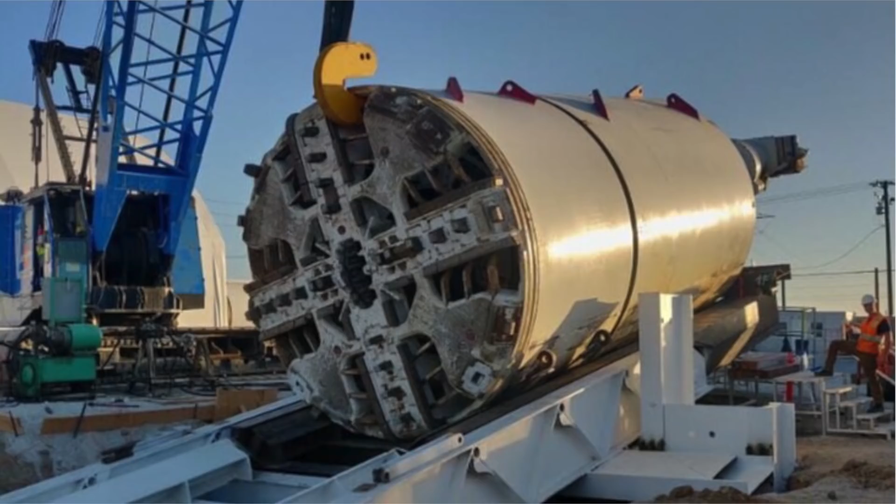There are now 5 parts to the Boring Company FAQ. There used to be just a simple FAQ. There's now tunnels, TBM, loop, safety, and construction. We're going to go through each one of those. The most exciting detail to me is about Prufrock. Prufrock is the future tunnel boring machine that Boring Company is working on that will be much faster and much more efficient and enable building a much larger tunnel network, making all of our lives better. So let's get going.

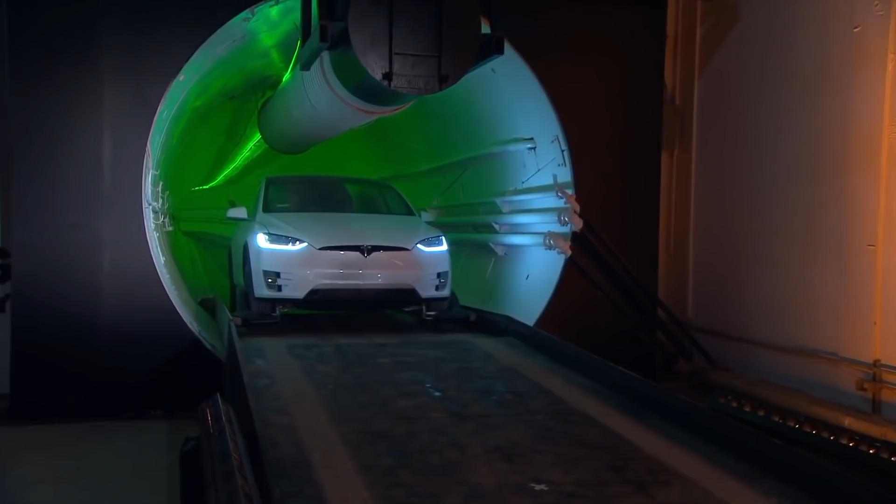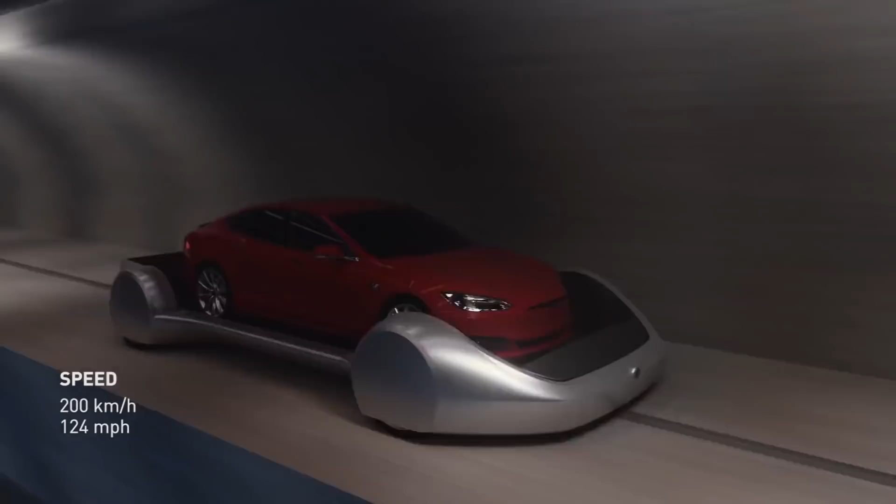First, on the tunneling section, I don't think a lot of this is new information, but they detail advantages of tunneling at some length. Unlimited capacity, you can build as many tunnels as you want. Minimal land use, the tunnels themselves go under land, so they don't really take up land. There's some land use for stations, but not a whole lot. Benefits of tunneling include unlimited capacity. No practical limit to how many layers of tunnels can be built, so any current or future capacity outcome can be achieved. This flexibility contrasts with a surface system where adding a lane to the road is often difficult.

This is a really big deal and one of the really big advantages of the Boring Company. It's very hard to build more roads on the surface because you're operating on a 2-dimensional surface. Tunnels operate in 3D, you can go deeper. And also, there are no buildings underground, so there's a lot more room even on one level. So, huge advantage for the Boring Company here.

Another thing they mentioned, minimal land use. The tunnels don't use a lot of land on the surface. Same basic point. Yes, there would be some stations, some spots where vehicles or people would come up and down from below, but most of the operations of the tunnel are underground, so they don't use surface land, which is valuable.

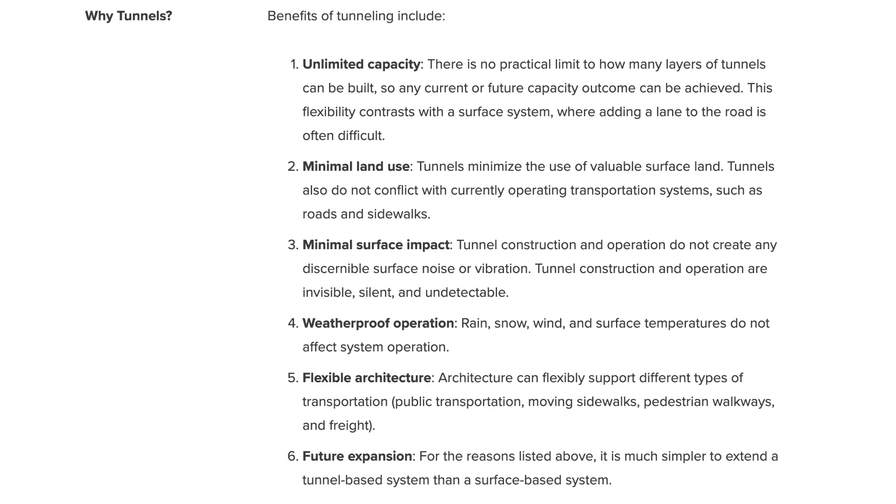And there's minimal surface impact, because it's deep enough, more than 30 feet underground, the impact of the tunneling and of the operation is not felt at ground level. If you've ever been in New York City above a subway, sometimes you feel it. The way the Boring Company plans on doing the tunnels, you shouldn't notice it from the surface. Weatherproof operation, that's an obvious benefit of tunnels. They're not affected by weather.

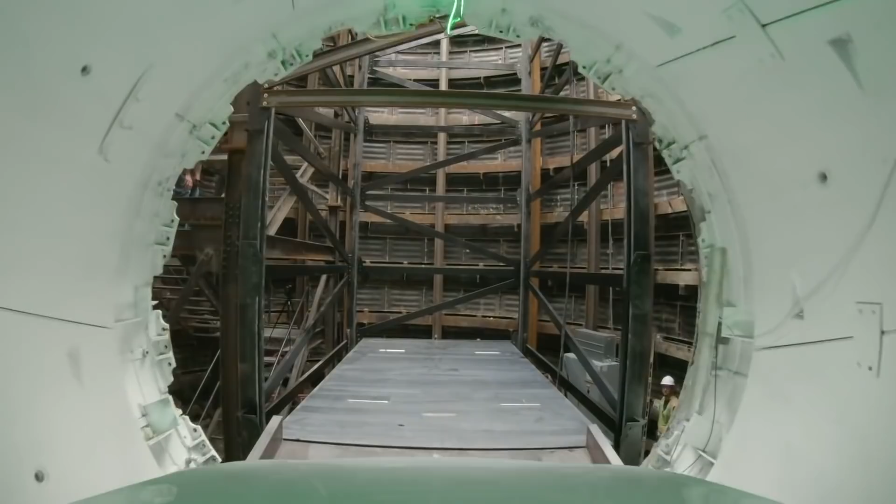Flexible architecture, you can do different kinds of transportation with tunnels. There's a lot you can do. Future expansion, it's easy to expand a tunnel-based system, as opposed to how much more difficult it is to expand a road-based system or a rail-based system. It talks about why this hasn't been done before. It used to be that tunneling was very, very expensive.

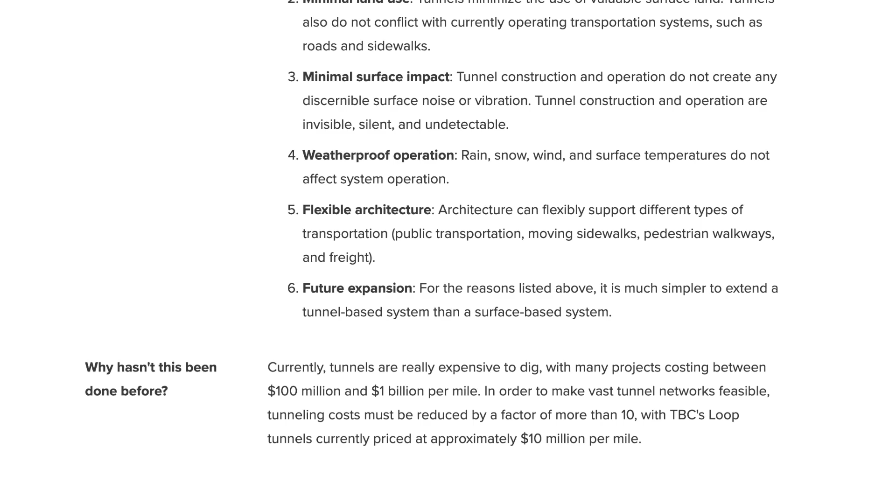One of the key things that the Boring Company is trying to do is reduce the cost per mile of tunneling. Where it might have been common in the past, and might still be common now, for tunneling to cost $100 million or $1 billion a mile, the Boring Company is already under $10 million a mile. And based on my conversation with Will, we think they very well may get down to $5 million a mile or less.

This is a fun part. This is Prufrock. Prufrock is the long-term goal. For those who haven't followed the Boring Company before, the first boring machine that did the tunnel in Hawthorne, California at SpaceX headquarters is called Godot. There was supposed to be an intermediate tunnel boring machine called Linestorm. As best I can tell from my conversation with Will, the machine used for the Las Vegas project was a mix of Godot and Linestorm, and it was achieving somewhat higher speeds, and it got its cost down to maybe $7.7 million a mile instead of the $10 million a mile they've been talking about.

So this picture that they have here is of Prufrock, and it's important to note the way they have it pictured. It's on a cradle, and we're going to explain this cradle in a minute, but notice that cradle. This is going to play into what's coming.

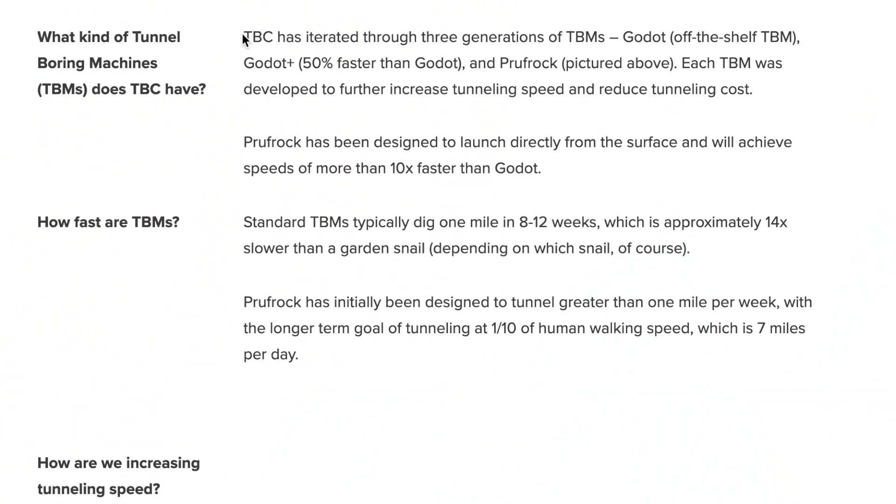As explained here, the Boring Company has iterated through 3 generations of tunnel boring machines. Godot was an off-the-shelf tunnel boring machine. Godot Plus was 50% faster. I guess they've left out Linestorm, so I guess the machine that they used in Las Vegas was Godot Plus, and they skipped over doing Linestorm. It used to be there was this idea they were going to have an intermediate machine called Linestorm, and it looks like they've given that up, and they're going straight to Prufrock.

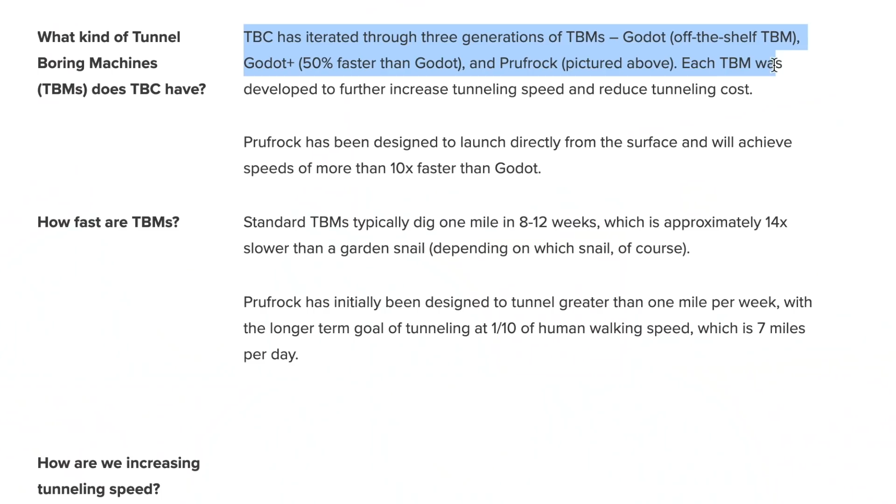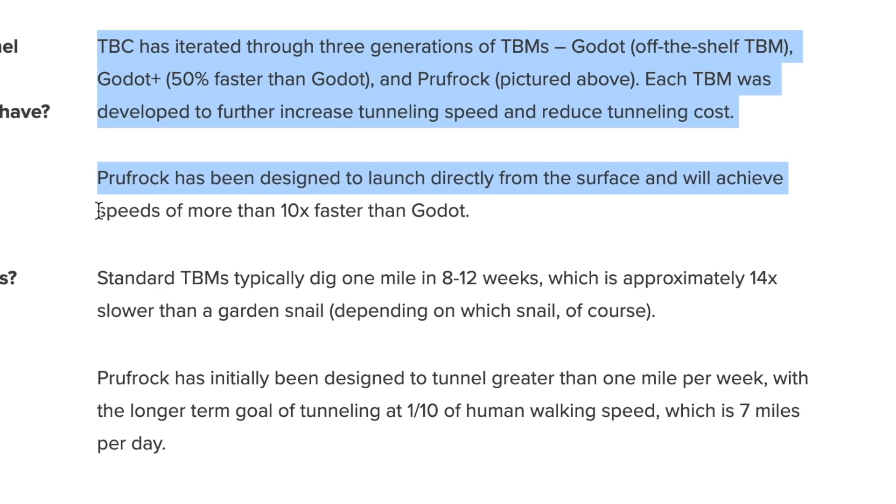Each tunnel boring machine was developed to further increase tunneling speed and reduce tunneling cost. And Prufrock has been designed to launch directly from the surface and will achieve speeds of more than 10 times faster than Godot. We're going to come up to this again, but that's what that cradle is for, launching directly into the ground.

The old style, I'll explain this. The previous method that the Boring Company was using was you dig a big hole, you lower the tunnel boring machine into the hole, and then it bores from there. The model that they're using now, which has been done elsewhere, is you tilt it at the ground and let it bore straight into the ground, making a ramp down to whatever level it's going to, and that's more efficient.

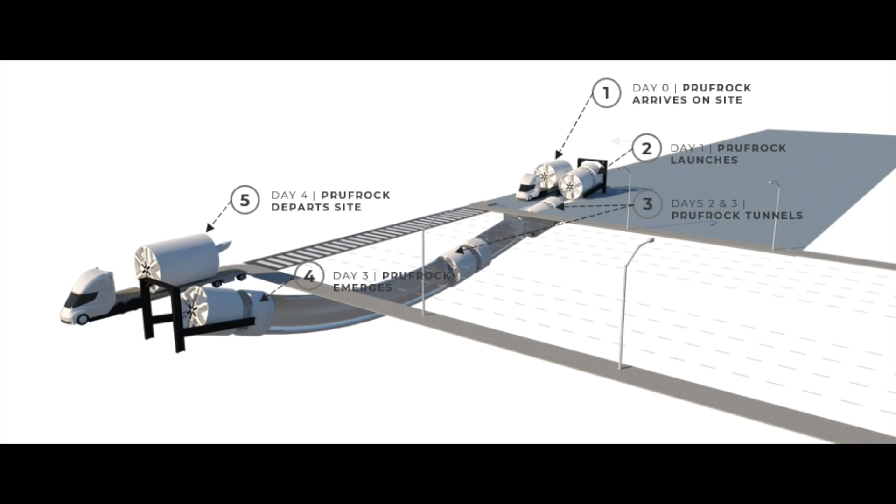Old style tunnel boring machines typically dig a mile in 8 to 12 weeks, which is about 14 times slower than a garden snail, depending on which snail. Prufrock has been designed to tunnel greater than 1 mile per week with a long-term goal of tunneling at 1/10 of human walking speed, which is 7 miles a day. I believe they're saying human walking speed is 7 miles a day, so they would achieve 0.7 miles a day. That's actually a little bit unclear in the FAQ.

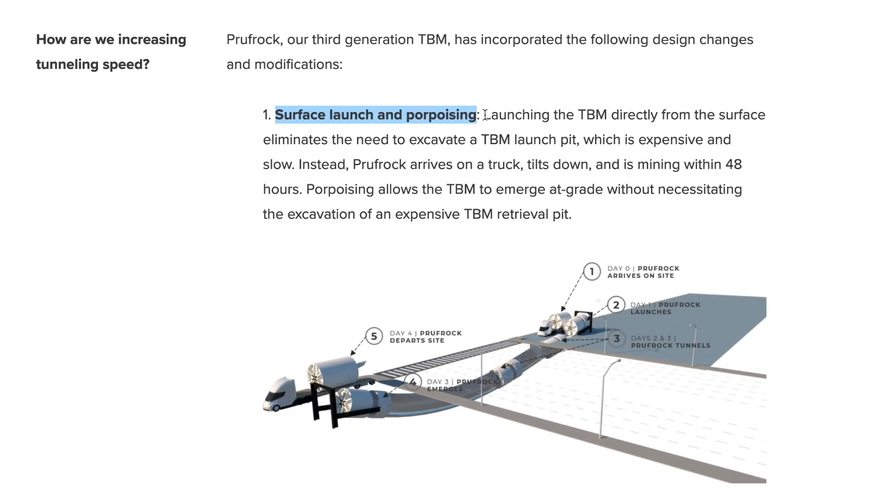How are they increasing tunneling speed? This is where we get to the surface launch, that cradle we saw in that photo. Launching the tunnel boring machine directly from the surface eliminates the need to excavate a launch pit, which is very expensive and slow. Instead, it arrives on a truck, tilts down, and is mining within 48 hours.

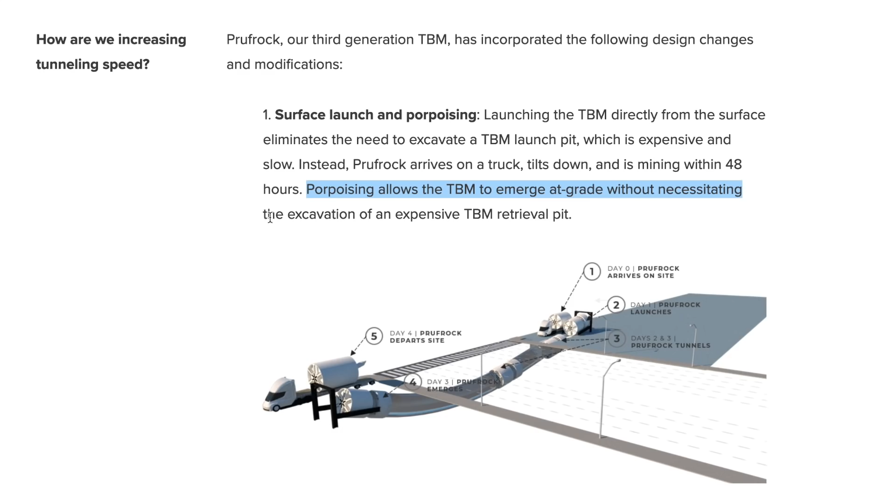Porpoising, diving down and diving back up, allows it to emerge at grade without necessitating the excavation of an expensive TBM retrieval pit. In other words, they would have to excavate a pit on both ends. And because of the way they're doing it, they don't have to do that. And at the same time, this creates a ramp down to the tunnel and a ramp out of the tunnel, which is also more efficient.

Another thing to increase speed that they've talked about before is continuous mining. A lot of times with tunneling, they tunnel a certain distance and then they have to stop because they have to put things on the walls of the tunnel to keep the tunnel from collapsing. So they use precast concrete segments.

The goal is to make it so that the concrete segments are put up as the machine keeps going and the machine doesn't need to stop while that is done. Maybe the machine is able to do it itself, or maybe they will have some sort of system behind the machine to install the segments as it moves. You want to triple the power. This is an important detail. If you have more power, you can grind away faster.

Eliminating rail. This is another thing that I think is very new on the FAQ page. This is something we haven't seen before from the Boring Company. I don't think it's that surprising, but in the past they have put rail-based locomotives to move things in and out of the tunnel. As they bore the tunnel, they lay rail behind it, and laying the rail takes time.

And the Boring Company has adopted an approach where they use rubber-wheeled segment trucks that are carrying the concrete segments they're going to be putting up behind the boring machine. And doing that makes everything faster. And it prevents problems like if the locomotive falls off the rail.

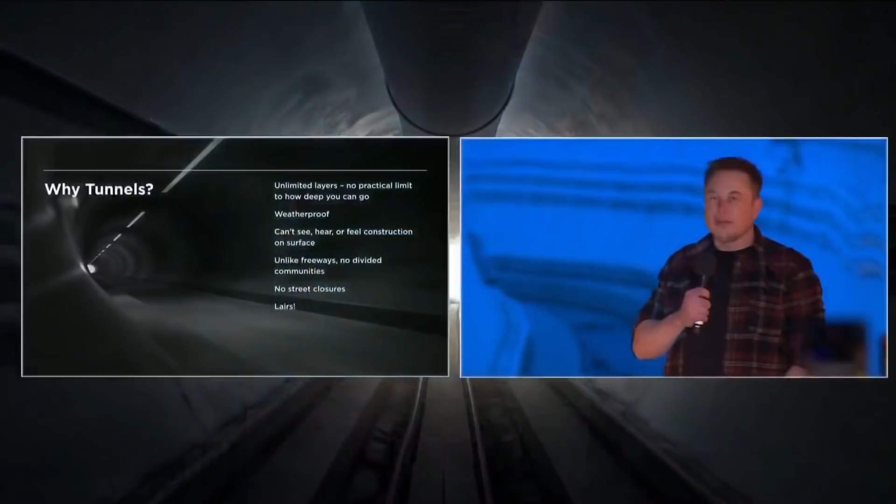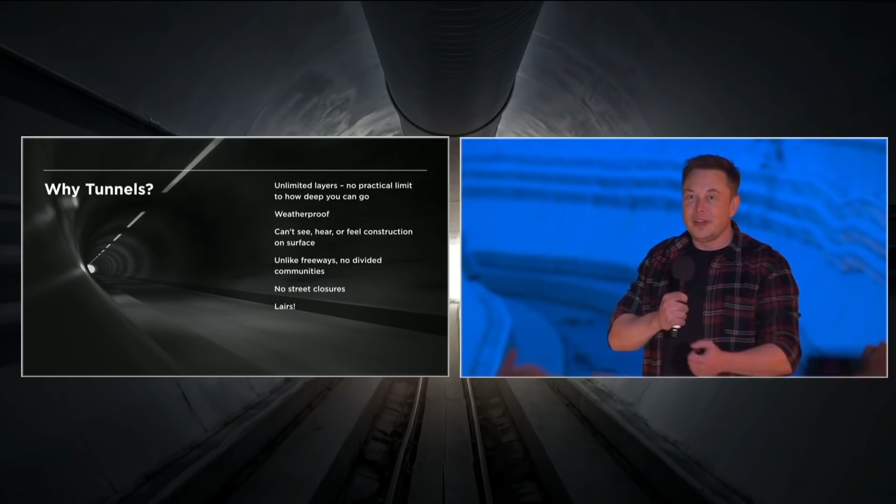By going from what used to be maybe 28 feet tunnels down to 12 feet tunnels, it means number one, you have to excavate less dirt. So you're doing less work in terms of digging, where the boring machine is boring out a cylinder. The cylinder diameter is smaller, and the way geometry works, if you have half the diameter, you actually have a quarter of the material. So it's a lot less work, and that's a lot less stuff to take out. One of the big difficulties in boring tunnels is you got to get rid of the stuff after you dig it out. There's less stuff to get rid of.

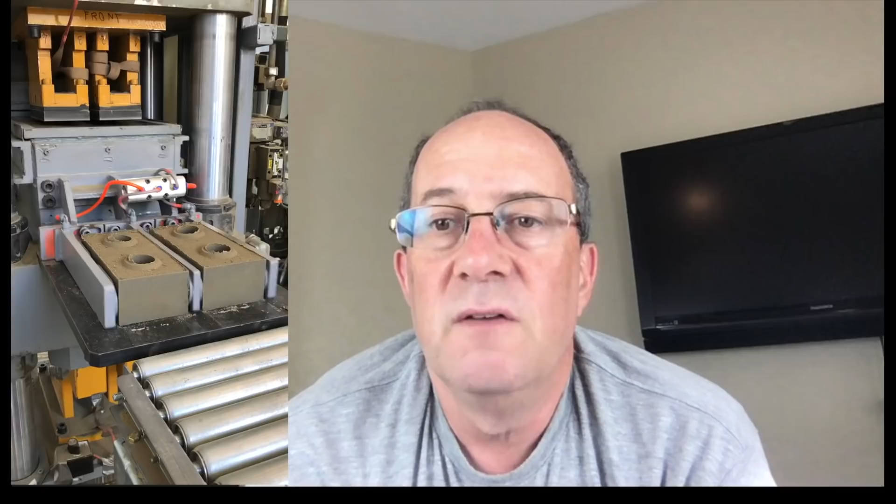Another big step is repurposing the dirt. So you dig up stuff and you excavate the tunnel and you got all this stuff. The Boring Company is working on repurposing the muck as bricks and pavers for housing projects, embankment beautification, other uses. I believe they're talking about making bricks for 10 cents a piece, boring bricks. We've talked about that before. It's not new, but it's new on the FAQ.

Last one, designing and using all-electric tunneling equipment. Doing the tunnel with all-electric tunneling equipment, including a segment liner truck, results in a cleaner tunnel with simpler ventilation requirements. When you use diesel, it's emitting a lot of fumes and you have to ventilate the tunnel. Otherwise, you're going to get carbon monoxide poisoning or other kinds of pollution. If you're using electric machines, then you don't have to worry about fumes. A great advance.

Next, they talk about the Loop system. This is a new thing. I think we knew a lot of this, but they've put it in a way that it's easier to understand now. What is Loop? Loop is an all-electric, zero-emissions, high-speed underground public transportation system in which passengers are transported via compatible autonomous electric vehicles at up to 150 miles per hour through main artery tunnels between stations.

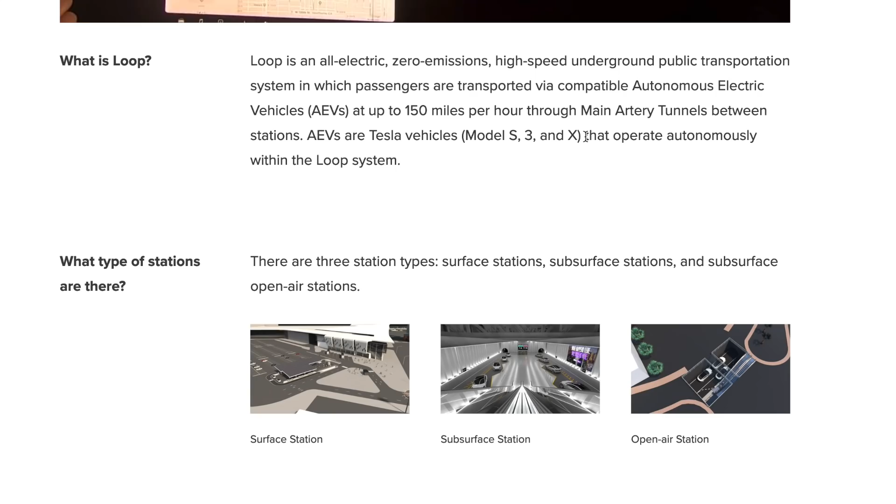AEVs are Tesla vehicles, Models S, 3 and X, that operate autonomously within the Loop system. They specifically refer to Models S, 3 and X. Presumably they would also include Model Y, Cybertruck when it's available. I would assume that they would allow Cybertruck. Maybe it's too wide, but I don't think it's any wider or significantly wider than Model S or X.

A lot of us think there will be a Tesla minibus that would allow a larger number of passengers. One of the things I talked about with Will is maybe there will be mass transit tunnels that are designed and used with high-capacity vehicles like a Tesla minibus, and maybe there will be other tunnels where you're driving down the road and you can just drop into a loop and avoid traffic. It's not clear how much they're going to do one or the other. We think that's coming, but that's the idea of how flexible tunneling is, what kind of flexible systems you can create.

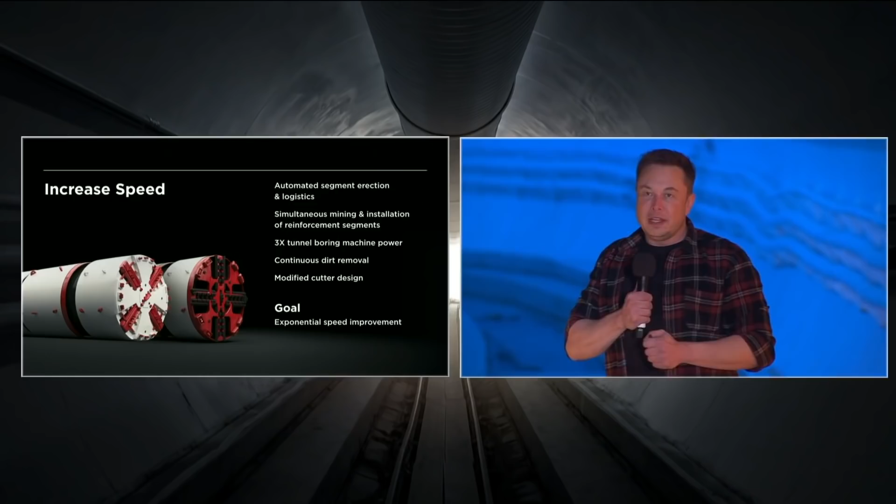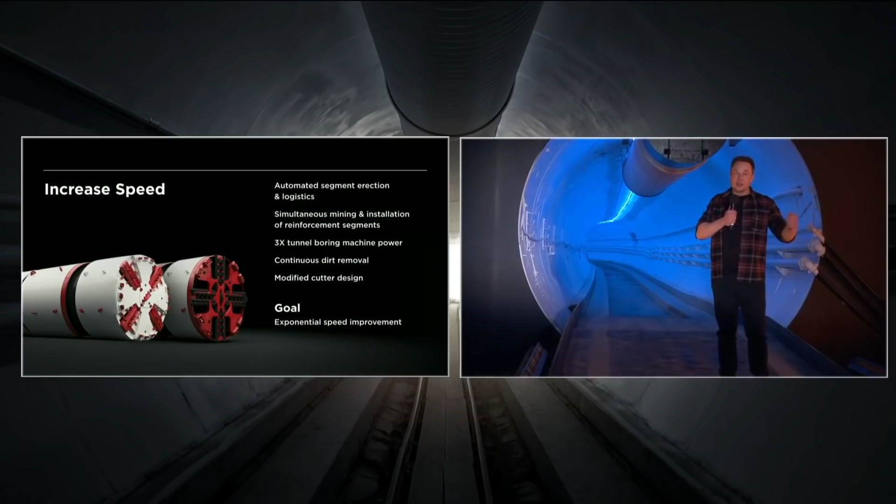From what I can see, the Las Vegas tunnel system and the Dugout Loop and the system at the Ontario International Airport, those are not going to be for regular Tesla vehicles that just pop in and drive along. Those are going to be for purpose-built vehicles to take larger numbers of people from point A to point B, like from the airport to the train station, or from the transit system to Dodger Stadium, or in Las Vegas at the convention center, and maybe from Las Vegas Airport to some casinos.

But stuff they've done so far is not designed for regular people who are driving down the road to say, hey, there's a lot of traffic here, I think I'll drop into a tunnel. That doesn't seem to be what they're doing yet, although I think that's the future.

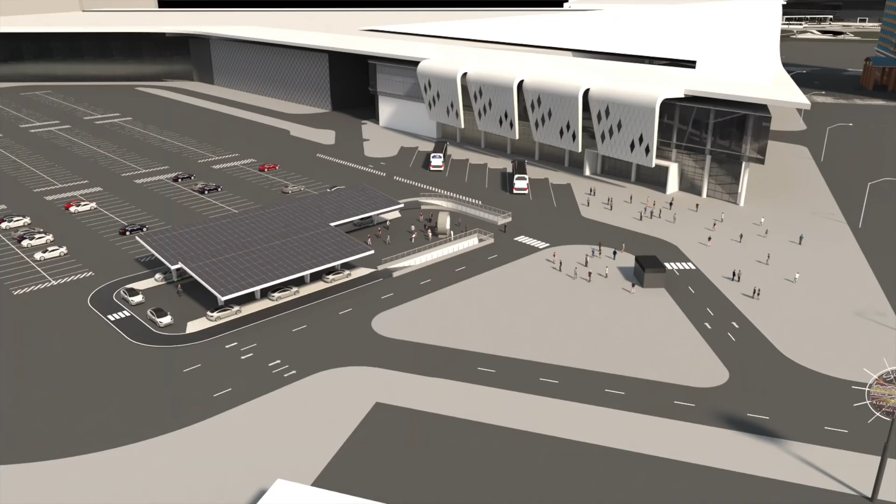They talk about different types of stations. This was a nice thing, and I'll include the pictures here. There's a surface station, which is what it looks like from up above. There's a subsurface station. You can see what it looks like down below. And then there's an open air station.

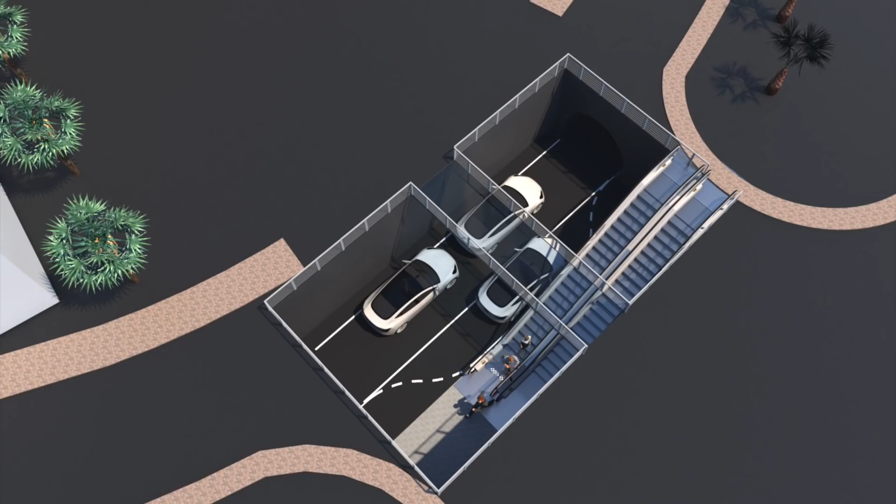And they don't really explain much of this. I think it's sort of self-explanatory, but I think the idea is an open air station is probably one that's in a less densely populated area, and that's just a quick stop for people to get out, where the surface and subsurface stations are main stations. So there's more detail here.

What is the ridership capacity of Loop? Loop ridership is a function of the number, size, and spacing of stations. Generally, high-volume Loop systems target 10,000 people per hour. That sounds like a lot of people. If a system requires greater ridership, you just add more tunnels. If a system requires much lower ridership, the tunnel system remains the same and smaller, less expensive stations are constructed, I think like that open air station that we saw a minute ago.

How much would a trip cost? Fare prices are project specific, but they predict they will be comparable to or lower than current public transportation fares. Again, I think this depends. Are you riding on their vehicle or are you driving through on your vehicle? Not sure where that's heading.

How is Loop different from a subway? Loop is an express public transportation system that resembles an underground highway more than a subway system. Passengers arrive directly at their final destination without stopping by traveling through a main artery tunnel and using side tunnels for AEV entry-exit.

To put it another way, if a subway line had 100 stops, a train would typically stop at each station. So the trip between stop 1 and stop 100 would be long. In contrast, Loop passengers travel directly to their destination, anywhere between stop 1 and stop 100, without stopping at the intermediate stations. The express system allows Loop AEVs to travel faster than conventional subway cars, up to 150 miles per hour versus up to 65 miles an hour.

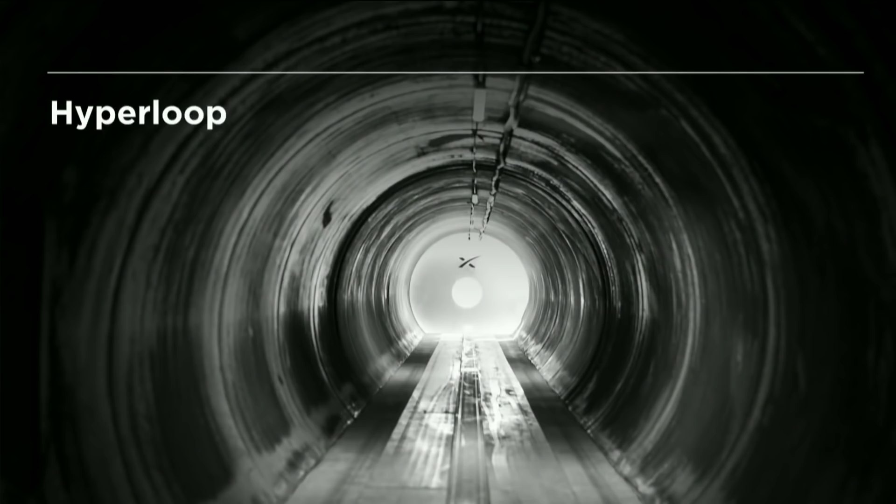But that's for another time.

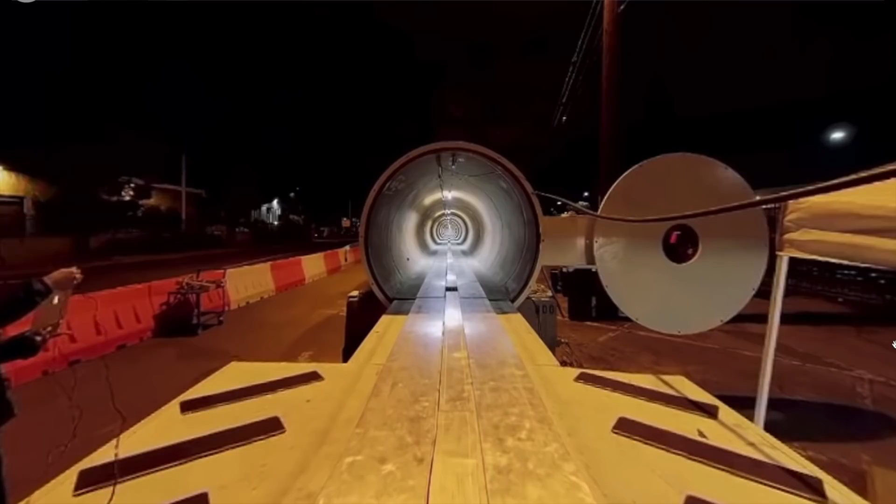There's this open question, will Hyperloop run above ground or underground? And a lot of people have said, oh no, Hyperloop will run above ground. And this is a very clear statement from the Boring Company that their intention is to run Hyperloops underground in Boring Company tunnels, because they say Hyperloop will be used for longer intercity routes, and the tunnels are designed and built in preparation for eventual transition to Hyperloop.

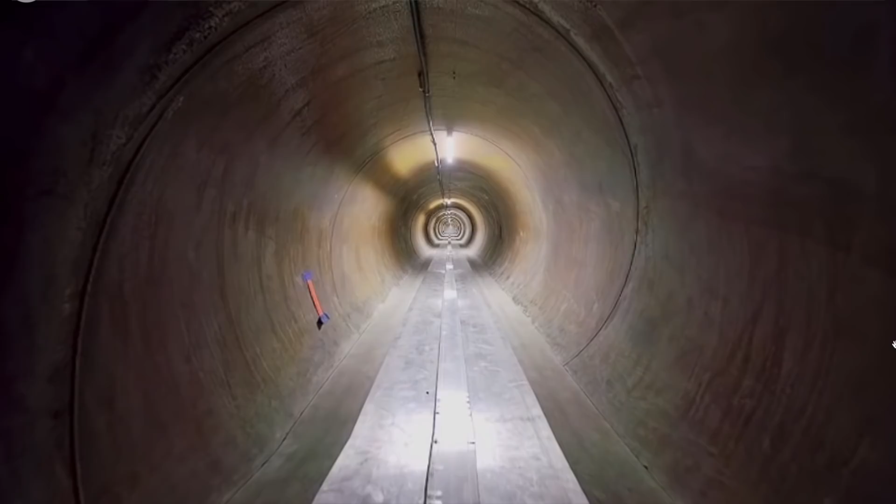One of the key details here is it has to be a vacuum-sealed tunnel that allows them to lower the amount of air to reduce the air pressure in the tunnel, which allows vehicles to go without having to fight the air friction, air resistance, wind resistance. By getting most of the air out of the tunnel, they have much less wind resistance, and it's easier for vehicles to go much faster with very little resistance. And that means you can go faster, and it means you use less energy to go faster.

And there's all kinds of problems. If you go fast in a tunnel, you got to push the air out of the way. The air has to go somewhere. This removes all those problems. So a very promising thing to see this about Hyperloop.

Really quick, they mention safety, and in particular, they talk about the safety of Tesla vehicles, that the Tesla Models 3, S, and X have achieved top ratings of 5 stars and low probability of injury. I don't think that's any new information. It's worth seeing. If the plan is to use Tesla vehicles, they will be safe. The reality is there shouldn't be crashes in the tunnels in the first place. So I'm not sure why that was added.

Hopefully there won't be any crashes in tunnels. If there are crashes in the tunnels, we got bigger problems. Especially if you're going 150 miles an hour. I'm not sure how much vehicle safety is going to help you at that speed.

Another common question people have is, how do people evacuate? And they say loop tunnels will have emergency exits along the tunnel route. However, unlike most subway systems, Loop has no internal hazards. There's no 600-volt third rail. And the entire paved surface serves as an emergency walkway. The egress path, which is how you get out, is thus safe and wide despite the reduced tunnel diameter.

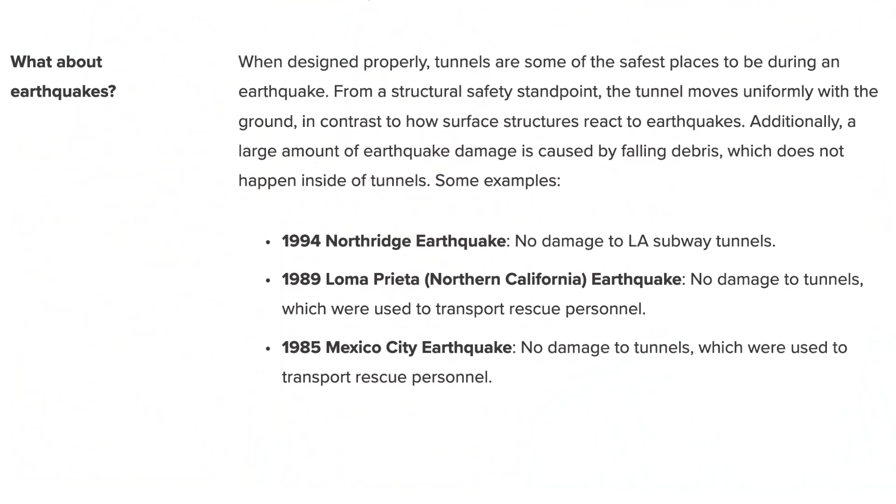The FAQ briefly addresses earthquakes. This is another common misconception people have, and I've seen them talk about this before, so this isn't really new information. Tunnels are actually a very safe place to be in an earthquake because no building can fall on you when you're in a tunnel. Tunnels actually move as much as the ground does when there's an earthquake.

In the Loma Prieta earthquake, which I survived in 1989 in Northern California, the San Francisco area, there was no damage to tunnels, and those were used to transport rescue personnel. Tunnels are actually great for earthquake situations.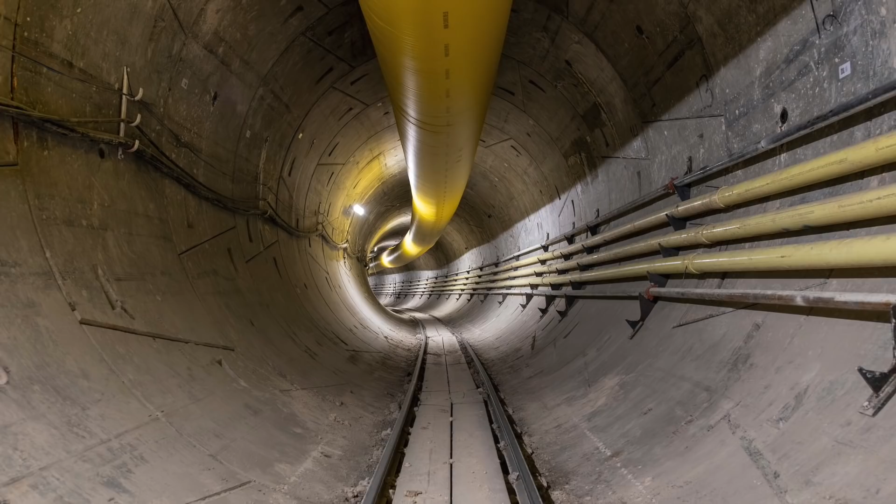So other uses, what about utilities? These tunnels are really well designed to be used for utilities, whether it's water pipes or other things. The tunnels are going to have a typical minimum depth of 30 feet. So that will be well below most utilities. They're not going to run into power lines or other water lines. Most utilities are typically less than 10 feet below surface, so it shouldn't be a problem. But if there is a situation where a utility is located deeper, it's easy to make the tunnel deeper.

Is there disruptive surface vibration or noise during tunneling? I think we already addressed that, but because they're so far down, once you're 2 tunnel diameters down or 28 feet down, and they're going to be more than 30 feet down, the tunneling process is almost impossible to detect. There's typically more surface vibration felt from a pedestrian walking nearby than from a tunnel boring machine operating 30 feet below.

What do you do with all the dirt? On typical projects, they ship the dirt off-site to disposal locations. It's costly, time-consuming, noisy, and environmentally bad. They recycle the muck into useful bricks, used to build anything. Not a new concept. Buildings have been done that way for years.